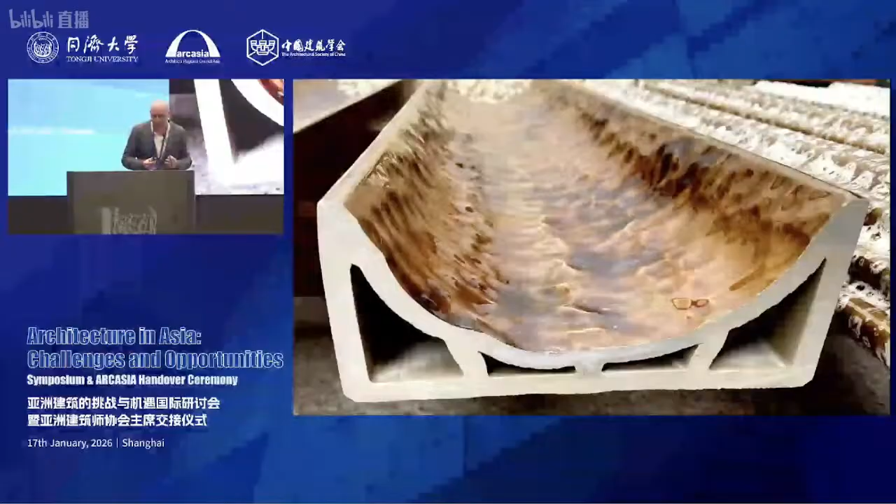But what this allows us to do then is bring more joy and detail and craft into an incredibly large building, but do it in a way that reflects the ancient histories and crafts of this region, but reinvents them for the modern era.

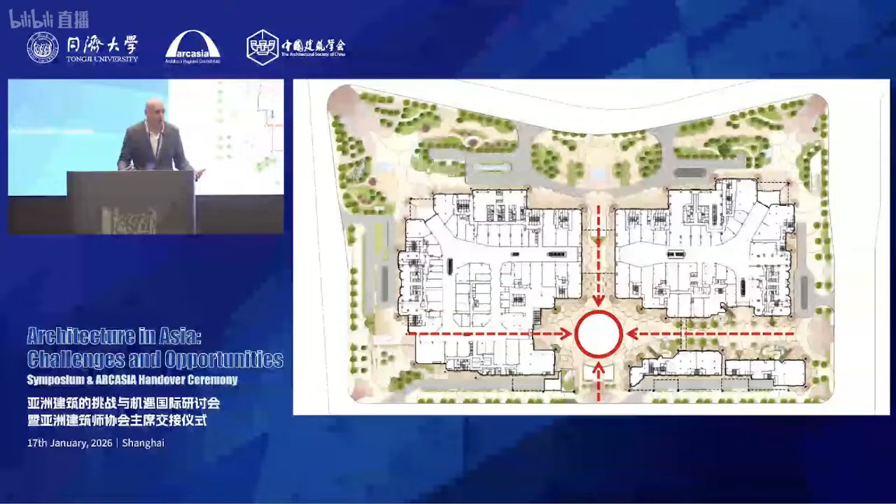And at the center of this scheme, this isn't just an insular shopping mall, of which there are now thousands across China. No one's interested in going to those shopping malls anymore. They want a physical experience. They want something to share with their friends. They want memories. They want to take pictures and post them.

And so our client asked us to come up with something that created a new center for this part of the city. We were inspired by this incredible 1,500-year-old tree—the scale, the color, the vibrance, the beauty, and the detail. So we tried to embed the spirit of that within the project itself, to create an underlying reference, something that is repeated through the design, something that helps invoke memories of the place.

Secondly, we were studying the Silk Road, which passed through the city. So we developed a design that creates a living sculpture representing the 7 biomes across the Silk Road. What this does is create something that is distinct—very modern, and yet it has its roots and its inspiration in a historic past.

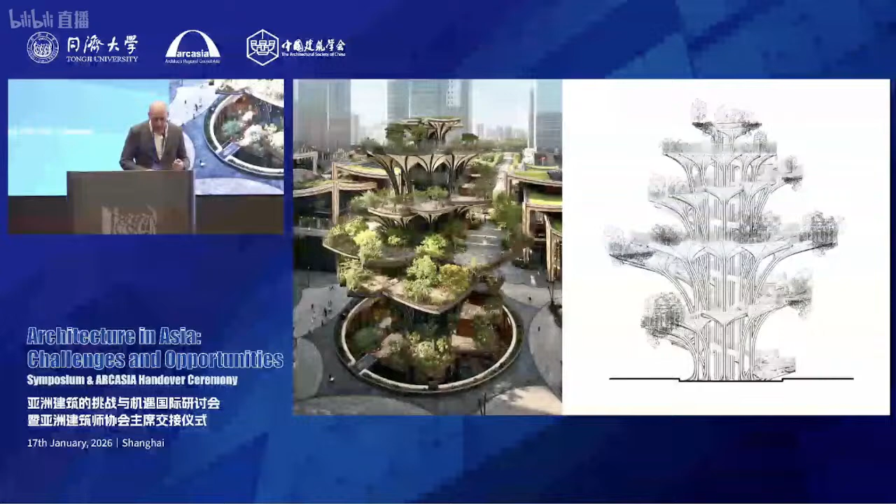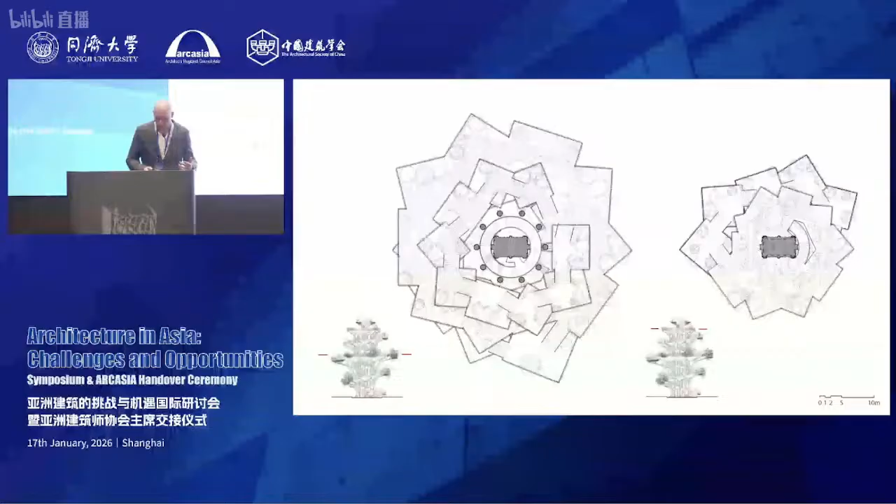It's a walkable living sculpture that embeds biodiversity, embeds stories from the past, embeds history, but creates a dynamic, forward-thinking, gravitational moment that will draw people out to come and visit this destination. It is very man-made, unashamedly man-made, and yet it has a conversation with nature. It is deeply textural, deeply sculptural, and yet it also becomes a canvas for artworks and light shows to form the centerpiece of celebrations within the local community and the city.

And on the roof of the development, rather than position all of the mechanical equipment which normally goes on the roofs of buildings, we created parks that are open to the public and free to access. This is a gift of generosity from the client back to the city, creating freely available open space where normally it would be inaccessible and purely equipment.

And so we can now, with our modern ways of building and technologies, inject buildings with nature. We can create new types of environments, new hybrid environments that really help soften and allow us to bring the best of both worlds, both nature and man-made.

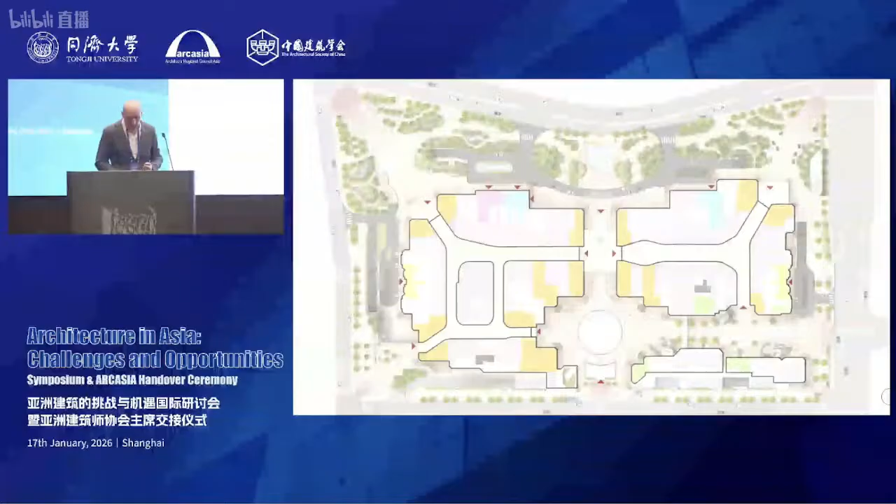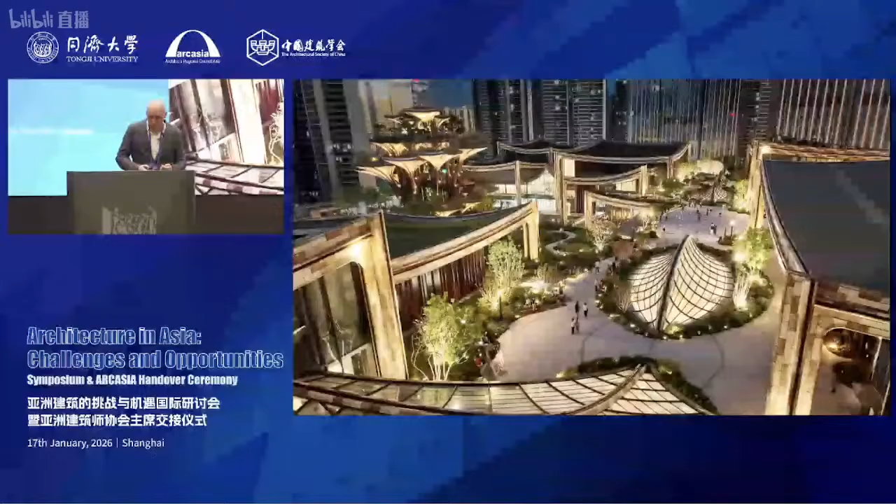And inside as well, we focused on craft. We want everything to have a story, a texture, and a detail. For us, it's not just about the building, it's about these small human moments of connection that people can come together and enjoy and be inspired by interesting design.

So this is a building of big scale, a building of small details, but each has had love and attention. That's something we think is more achievable with modern ways of making, modern ways of using digital fabrication, AI. All of these things can be combined with ancient ways of making to create new futures that reflect our culture now.

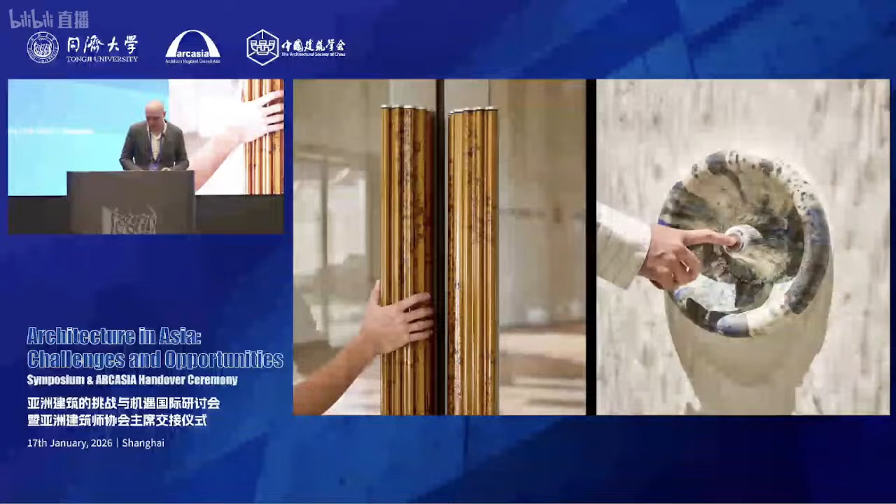In this age, we've moved from a period of growth, speed and efficiency to cater for growing populations and growing economies. Now I think we can reconnect with the past and slow down a little bit, take a little more care, think about mental health as well as economic health as well as planet health, and really create buildings which are more public, more generous, with more ornament and detail and stories and humor, and hopefully more nature.

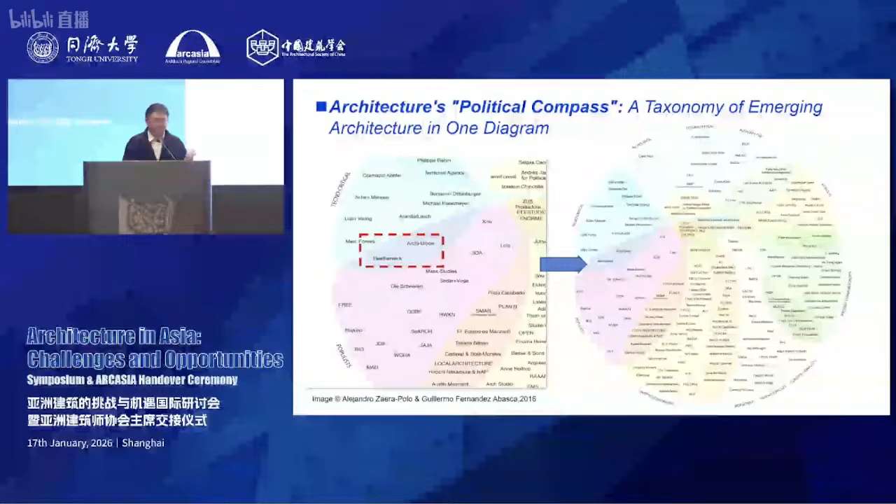And also two years ago, one of the leading professors at UCL, named Mario Carpo, put forward a diagram listing all kinds of booming technology, especially AI and digital, over the past 50 years.

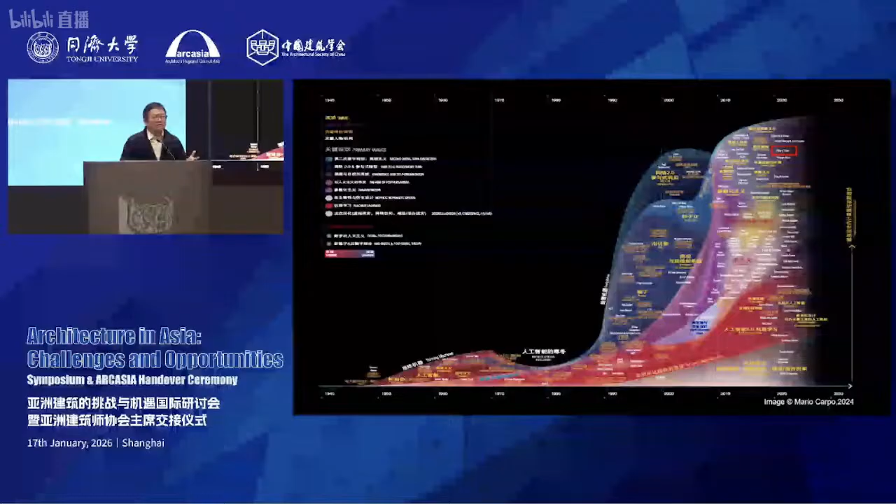So I'm lucky, my name is on the right corner, related to digital tectonics, I think, which is also the global culture, which is booming, and also this kind of non-local thing, very focused on the technology.

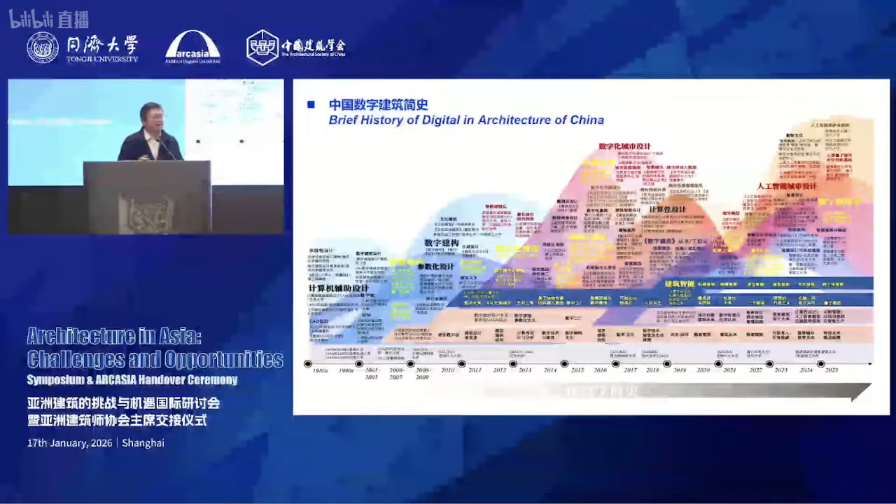In China, we have a brief history over the past 50 years of digital in architecture. The blue part is the event we host over the past 15 years, and the yellow is different topics, different apples, fruits we put on the plate. Every year we have different topics. You can see different kinds of concepts of digital in architecture over the years, which is really impressive. We follow the culture of this trend evolution, as well as lead what will be the next through on the practice and teaching affairs, which already happened in China.

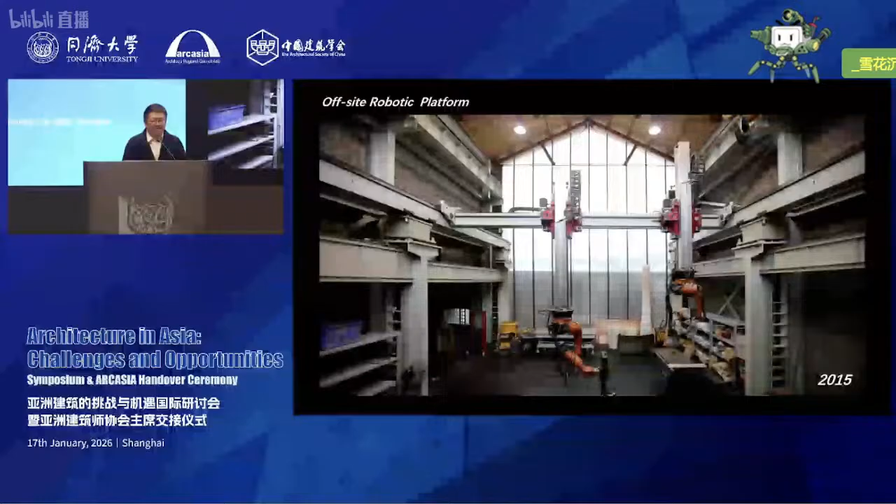Eleven years ago, we developed a special platform named Offsite Robotic Platform with two twin robotic teams, gantry teams, which can custom this kind of prefabrication technology, including 15 different kinds of crafts, totally collaborating with human and machine.

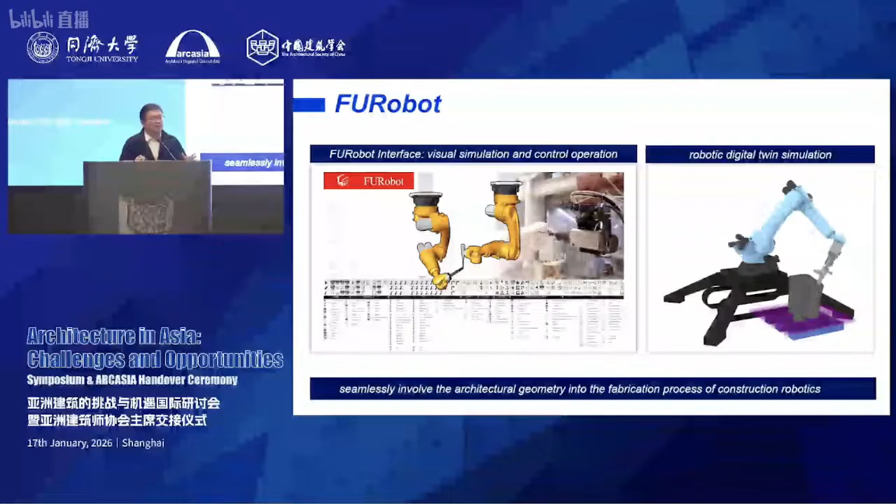We also developed FURobot, which is a software right now, AI-powered to enhance the robotics and collaborate with designers. It's kind of one straight express way to translate your drawing papers all the way to different crafts, different materialities, including 3D printing, robotic fabrication, and so on and so forth.

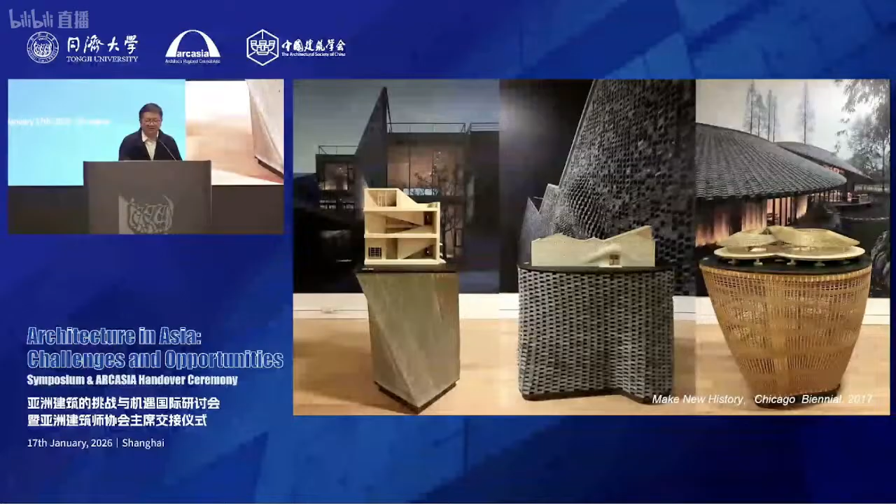During COVID, New York MoMA made an exhibition on the second floor named 'Reuse, Renew, Recycle: Recent Architecture from China,' and one of our projects was exhibited there. I think it also hit on a different topic at the time.

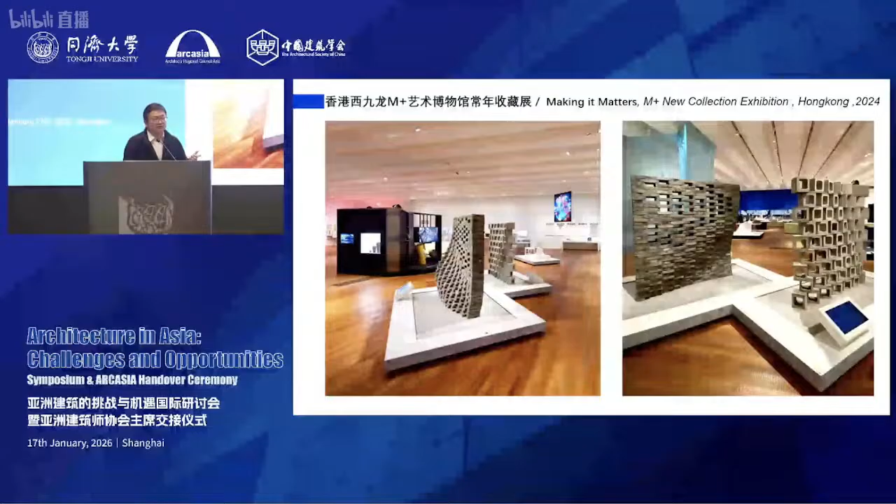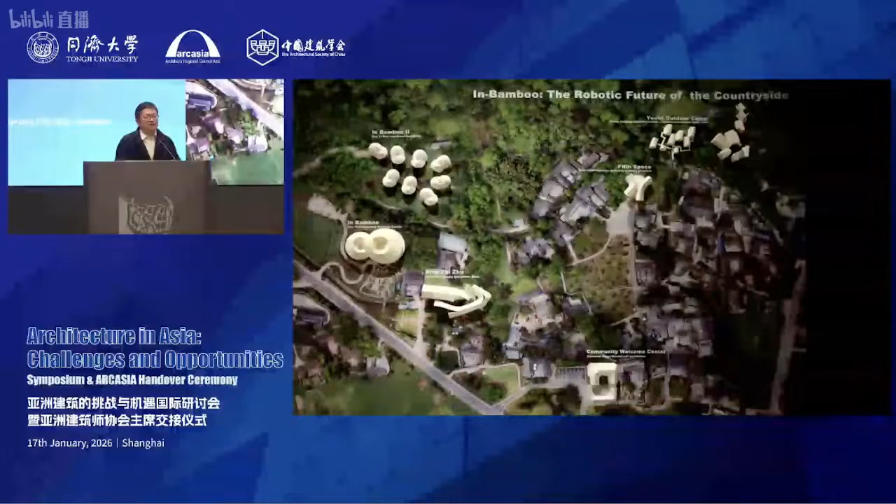I'd like to introduce this process to analyze what is non-local, what is locality, and the relation between them. The first project we finished in 2017 is called 'In Bamboo,' a couple of projects in one small village, including 87 families. We first designed the community center for them—the rural community center makes use of two rundown houses, trying to introduce public events into the community of the local people.

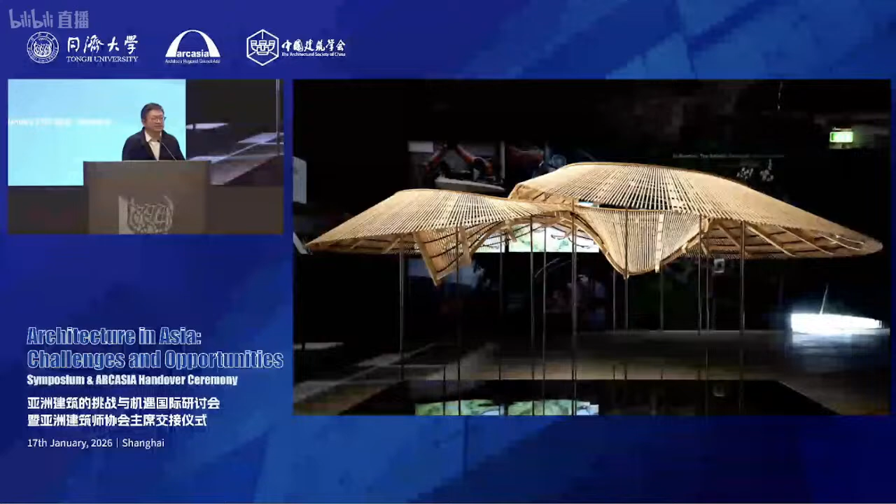This was exhibited at the 2018 Venice Biennale as a big model, and finally this model was collected by New York MoMA and Hong Kong M+. The model introduces a new topological geometry into the local timber material. You can see all these frameworks are actually different—so it's not mass production, it's very low production, but customized in a very short time. Every piece is different.

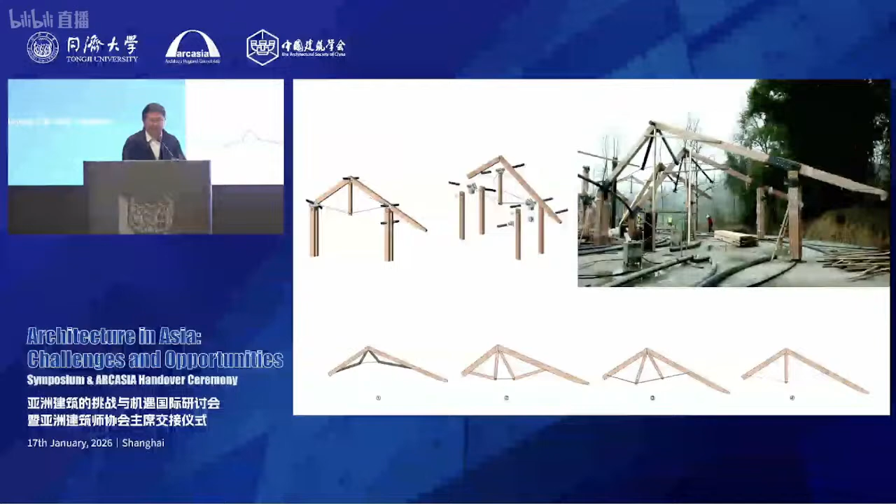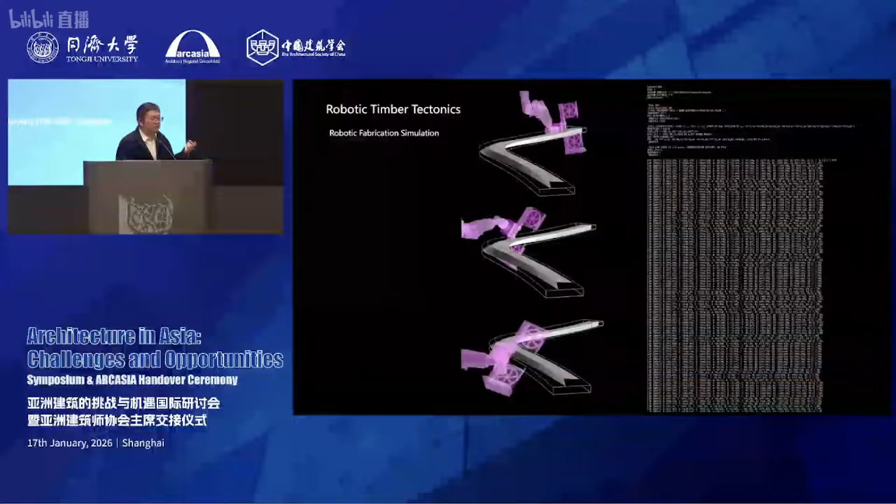We invited digital twins, including robotics, and controlled the robotics through scripting for this kind of craft. These are the detailed drawings—not paper drawings, not BIM modeling, but scripts that directly control the robotics fabrication in a very short time. This building was constructed in only 52 days, which is extremely intense. You can see 'In Bamboo' is kind of a poetic living style, which is local, but also introduces new technology into this practice. In this video, you can see how just one building starts to change this community.

Right now, it's become one of the most representative rural communities in Sichuan province, just because of the development of such rural public buildings.

And then, very close to this project, around 5 kilometers away, we designed another building named Eyes of Bamboo, because it's surrounded by bamboo forest. This building has a tectonic quality to it.

It has different layers, including the timber structure and the steel and timber collaborative composite structure system. We also use tiles to make the topological surface of the roof become both the wall and the roof.

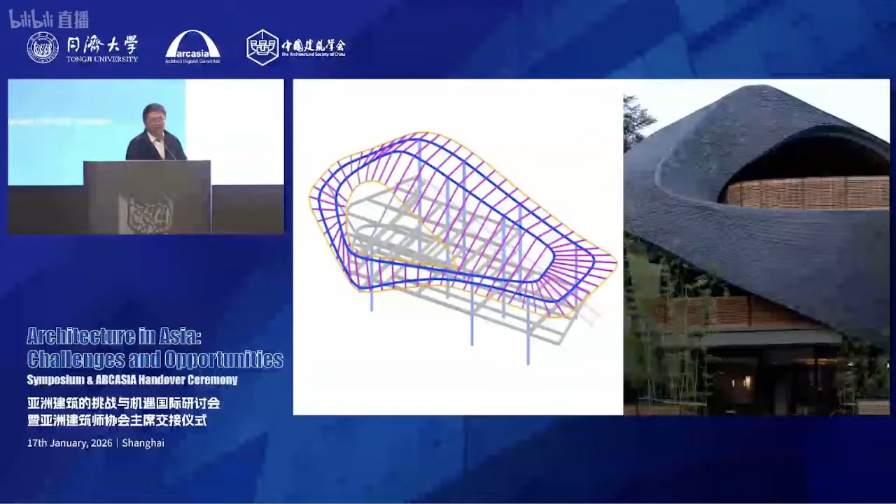This topological geometry also collaborates with the local culture, like the eyes located in the bamboo forest. You can see these buildings have materiality that's all localized, but the difference is we introduce this kind of hypergeometry into the design and construction process.

Another one is also very close by in Sichuan, built a year later, also introducing the same structure system. It's one of the local circulation spaces, including the farmers market at the weekend, and you can see people still doing a lot of allotment farming work at that time.

Passing through this strait, a similar local material introduced robotic brick construction, also using the steel and timber composite structure system to build a special topological geometry system into this very poetic bamboo forest.

The project is located in a rural area of China, which is normal. The local people have come to like it very much, they're proud of this kind of space, inviting friends and making special events very locally.

I think that's especially important to attract people back from the main cities. Over the years, they can gain confidence about the local culture and about local life.

This video shows the foggy season, which is typical in Lingpan, the bamboo forest area of Sichuan province.

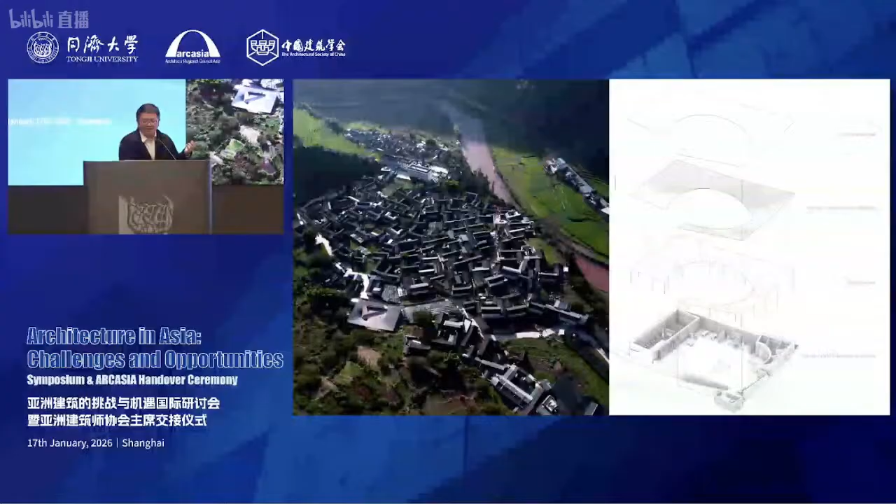Going through the process of construction quickly, we also introduced a lightweight steel structure with local materials, including rammed earth.

You can see the cow trails passing through these buildings, and the local material is collected from the riverside, including these red stones, also collected by the local people.

Year by year, they use these materials as sustainable materials for construction. This kind of vernacular adaptability is what you notice at first glimpse of the community hub, which is so familiar because of the materiality.

But when you see this pitched roof, it leads you somewhere that's not the functional use of the building, but becomes leading you to a public space. In the process, we implemented rammed earth crafts, which is the most familiar craft to the local villagers.

So all these buildings were constructed by the villagers themselves. This process is slow. They spend almost a year because they're busy with the farming season and cannot do construction then. During the busy planting and collecting season, they're just working as peasants. But after coming back, they start to construct the building layer by layer.

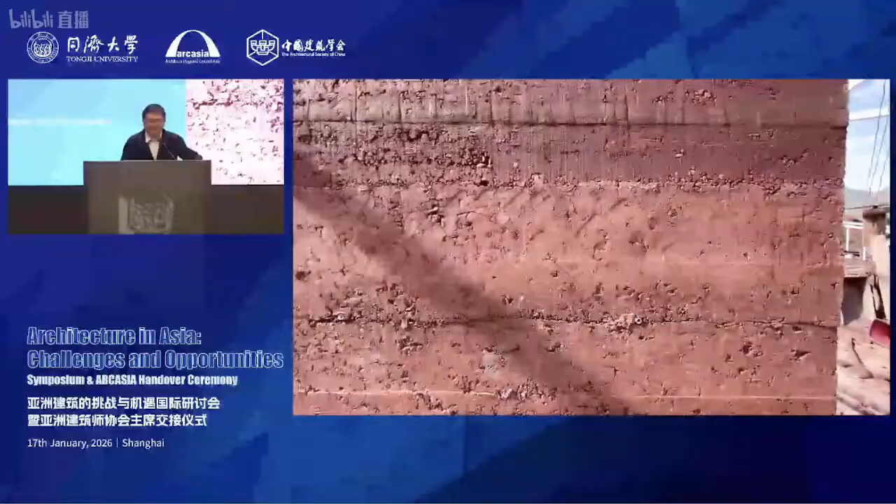When you see the beauty of the surface of the rammed wall, the marks and traces actually record the authenticity and the crafts which represent daily life in the village. When it was constructed, the local people liked it very much. It's a semi-open space that produces a gathering space, bringing daily life back to the rural people. You can see the happy times, the shape sculpting the wall, and the people's life is sculpted by this kind of building.

Isolation and poverty have left many elderly people and young children in the village. At critical moments, these people come together and you can see the smiles on their faces. After school, the children come here to gather, as well as in the morning and after farming work.

The square dancing, which is the Guangchangwu, is famous all over China. You can see people wearing special clothes coming back to do a lot of public work, as well as instruments being played under the floating corridor, bringing music back to daily life. It's also a special social event that reassembles the public space. When you look outside the window, the floating roof becomes part of the screen, integrating the square with nature.

Once, while shooting a picture during one of my visits back to the hub, I experienced the sublime of the mountains through the skill of two kids. I still remember asking them what their dream was for the future. One answered, 'I want to be a pilot.' The other said, 'I want to be a mule doctor.' Apparently the sublime is not just the scene in your eyes, but becomes the dream in your mind.

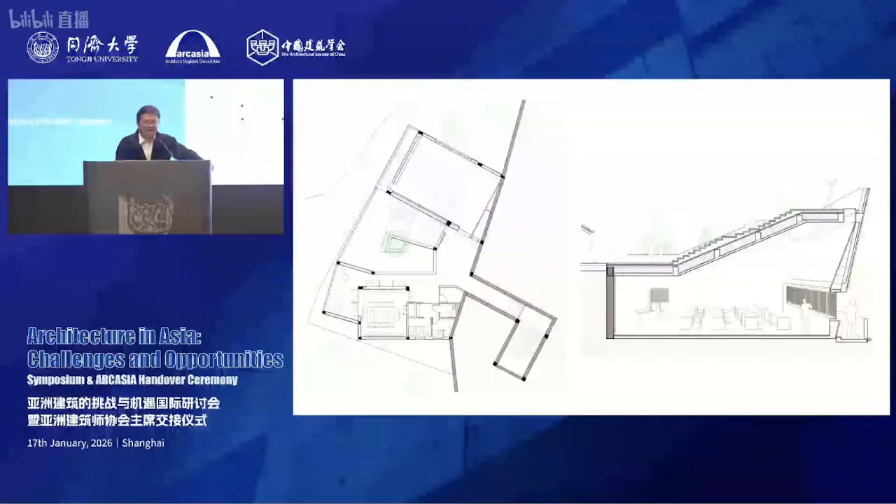Afterwards, we also constructed another academy, built very quickly, two years later, to produce education possibilities not only for the children in the schools but also for the villagers. The trails pass through, integrating the school with the mountain and with the university. You can see this kind of public space, and light and ventilation were introduced into these very low-cost buildings. When you look outside the window, you can see from the villages the publicity of this kind of sustainable village.

There are many events with different people, minority groups with their different events, and local crafts become livestreamed there. This building actually changed the different kinds of connections and the background of the villages at that time. We also gave lectures, sharing this living space with outside people coming to show this new kind of publicity. I think this new public space gave identity, which, while not entirely real, may be a little like a heterotopia, but it reassembles a novel social life.

This is the last video I want to show. This is a very local village, which you can see is normal for the rural areas of China. But because of this kind of building, we tried to introduce something to the local community—learning from local culture while also introducing new technology to change the quality and contemporaneity of the local community.

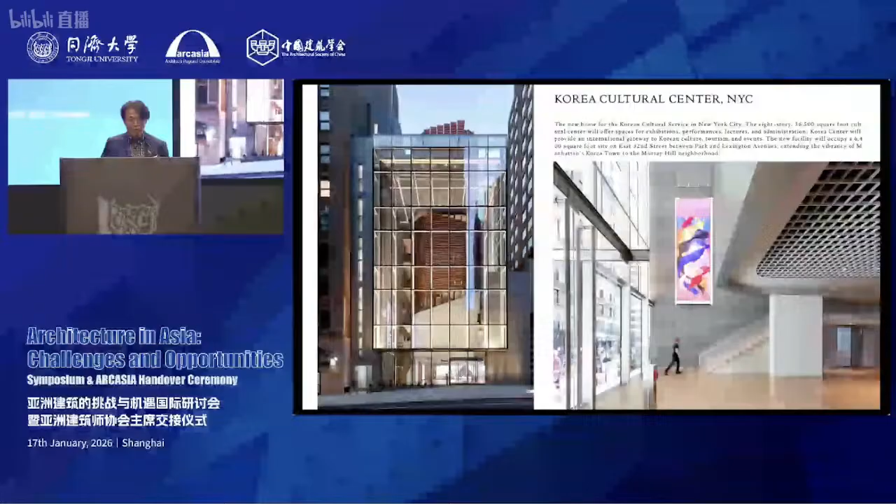My work experience, or my experience at ARCASIA, is relatively short compared with the very rich and dense experience of immediate past presidents Saifuddin, Wu Jiang, and Rita Soh, and Tan Pei-ying always gives us guidance.

I was helping the organizing committee of last year's ARCASIA Congress in Incheon, and I was tasked by our president to take care of the visas. I was thinking, that's easy, I have one intern, maybe I can take care of everyone. Then the intern came to me and said, we have 80 requests from Bangladesh. I have very good friends in Bangladesh. We also have a very big delegation registration from Pakistan. How do I convince our Ministry of Foreign Affairs that every one of them gets a visa? And Nepal also has a very big request.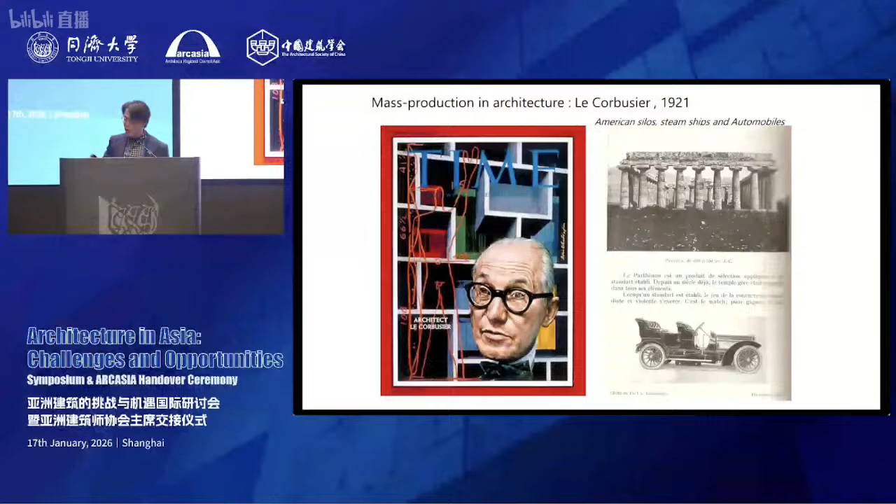But when the rebels in architecture met in La Sarraz in Switzerland, they had a visionary vision to make the world more democratic, with equivalent access to housing. That was a very good thing. And after that, there was some evolution happening.

But nowadays the world is watching, like the United States again withdrawing from the Paris Agreement, under Mr. Donald Trump. So the world is watching what will be Asia's path or trajectory to the carbon-free world.

But with ARCASIA, we need to bring an idea of a more circular, wholesome approach to architecture. I think Philip Yuan gave a very good presentation reminding us how architects can help a local village.

We need to think about ourselves, about life cycle, but in a more circular way. That's the agenda I want to push or develop under President Wu Jian.

About three years ago, many architects went to Copenhagen, and there was an announcement of the Copenhagen lessons. Lesson number three: existing built structures must always be reused first — that's a difficult one. No new development must erase greenfield.

Many architects are trying to push this agenda, but when I did a project for a client and told him no too much coating or paint, he said, 'Gibson, you will probably be sued in about three years.' That was a difficult challenge.

But in Asia we have plentiful inspiration from Geoffrey Bawa of Sri Lanka, and there are good cases from architect Liu Jiakun, last year's Pritzker winner.